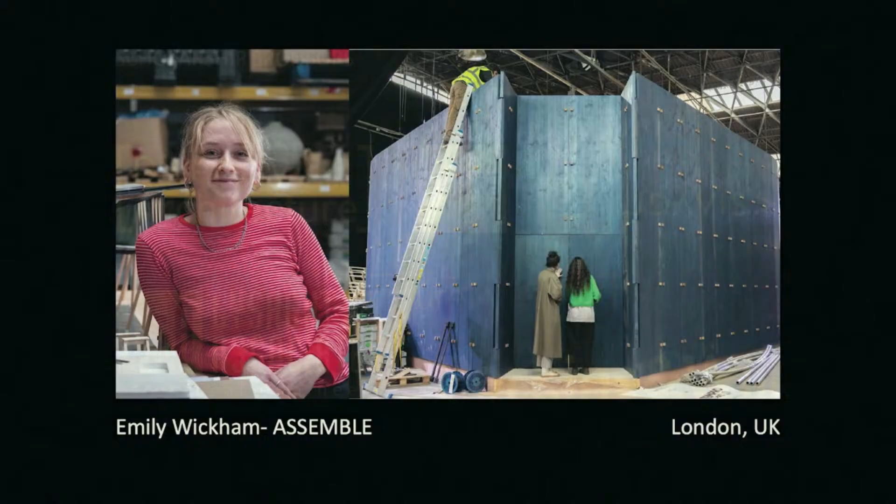Good evening, everybody. I'm coming out here because this makes me feel really extra short.

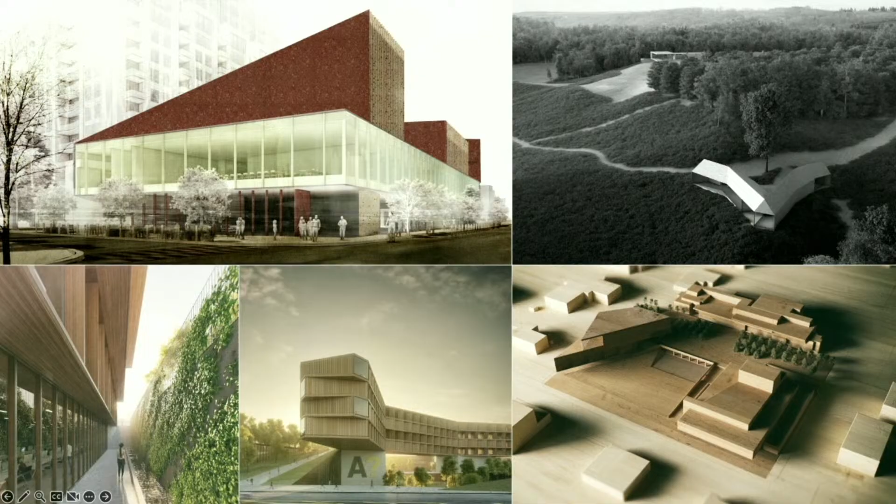Our challenge is to maintain a critical practice while also having a professional practice. So we're balancing client interests with our architectural voice. The things that we want to do and the things that we have to do become the same thing. Buildings have to function well, be sustainable, meet code, be resilient, but they also simply must be beautiful.

Everything you're seeing on this page is built, under construction, or kind of halfway there. The project on the top left is our first affordable housing project that we're really proud of, which you'll have to see next time because I'll show it when it's done.

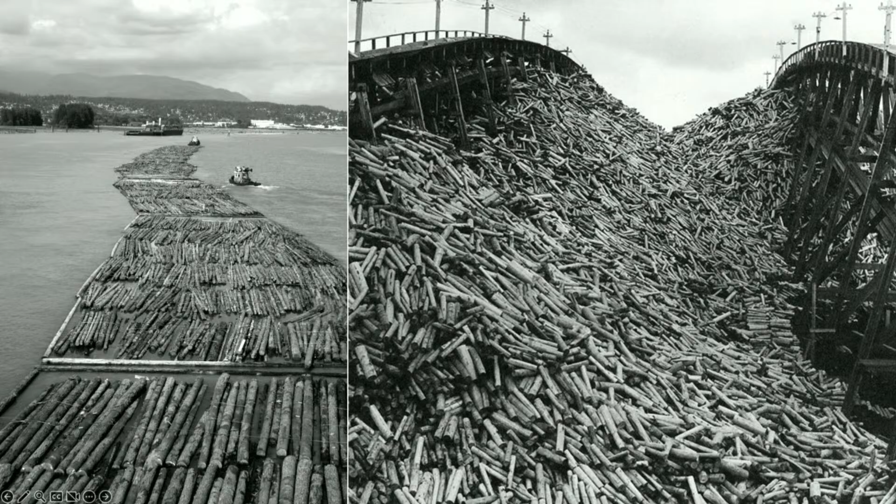Materials are primarily sold as raw materials. This is another log boom on the west coast of Fraser River in British Columbia. Canada leads the world in wood exports, with 31 billion kilograms of wood annually produced and exported as sawed timber, pulp, or paper, with the US, China, and Japan as the largest foreign markets.

So if you've been wondering why we've been in the news so much in the last six months, this is a big part of the reason why.

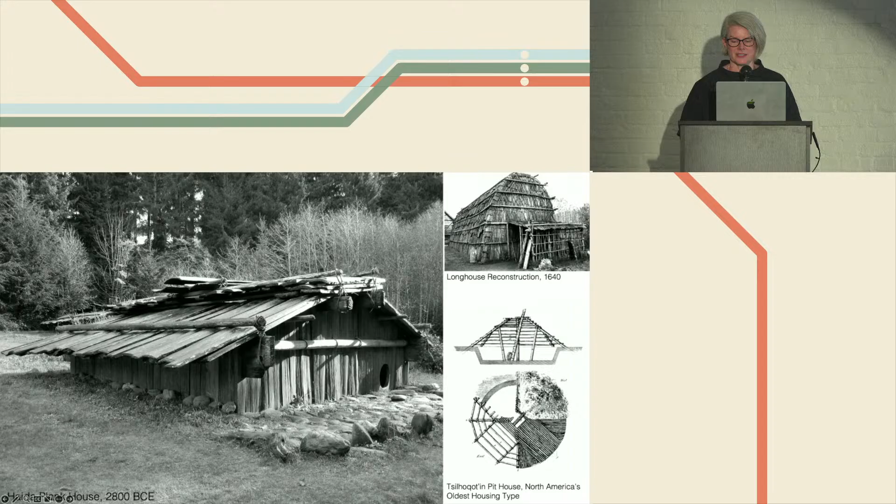Canada has a long history of building in wood. The indigenous peoples of Turtle Island developed rich building traditions thousands of years before the arrival of the first Europeans. There's a longhouse reconstruction from 1640, a basic house type of pre-contact northern Iroquois, all about communal living.

The Tsilhqot'in Pit House is regarded as North America's oldest house type. The Haida Plank House originated in 2800 BCE. That's on the west coast of Canada.

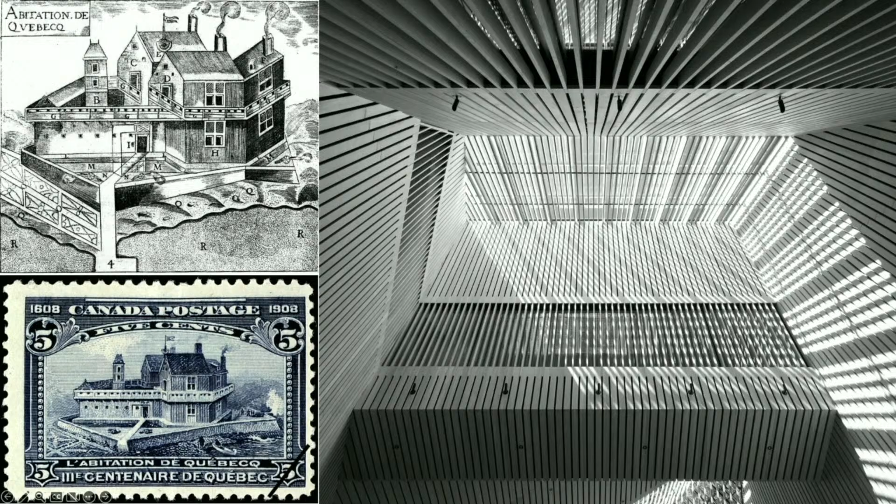Post-colonization, in more recent history, you see the Habitation de Quebec, the first colonial building built as a fort and trading center in Quebec. And on the right, the most recent history, John and Patricia Patkau's Audain Art Museum on the West Coast.

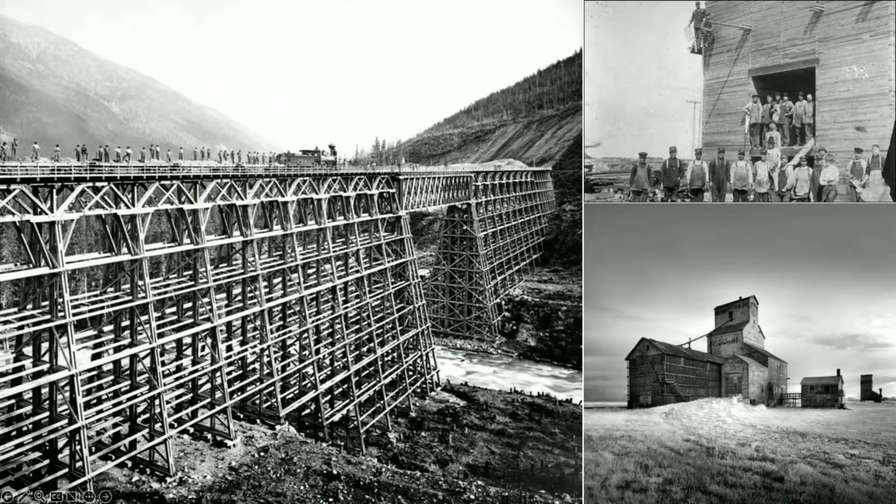There's also a deep tradition of wood structures defining industrial growth: the Mountain Creek Trestle Bridge in 1890 in Selkirk, British Columbia, and the famous Saskatchewan Prairie Silo. All the way across from east to west, there is a history of the people living in our region building from the materials around them.

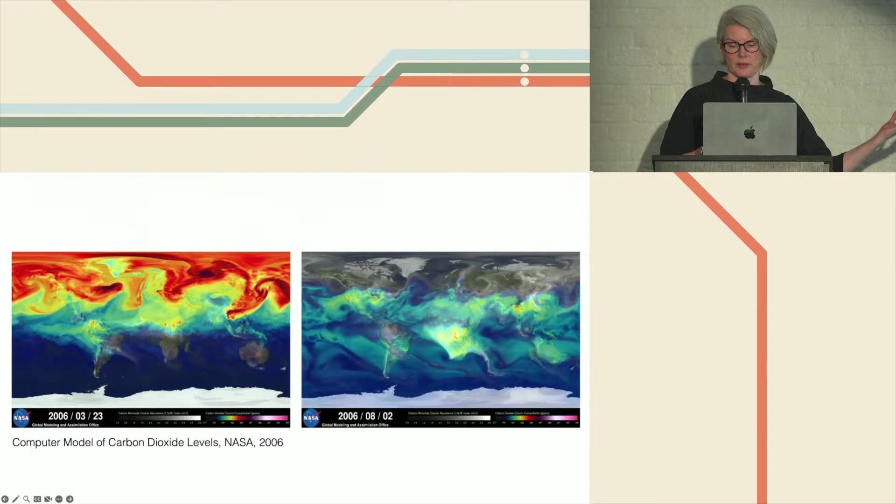So why is this important? Timber is important, and these are stills from an amazing NASA animation of a year in the life of carbon in the atmosphere. It's Googleable and on YouTube, and it's a really cool video to watch.

It shows that in the winter months, on the left, the carbon in the atmosphere, shown in red, is highly concentrated over urban centers. Then when the trees all pop their leaves, you see August 2nd on the right, and you can see how much carbon is removed from the air.

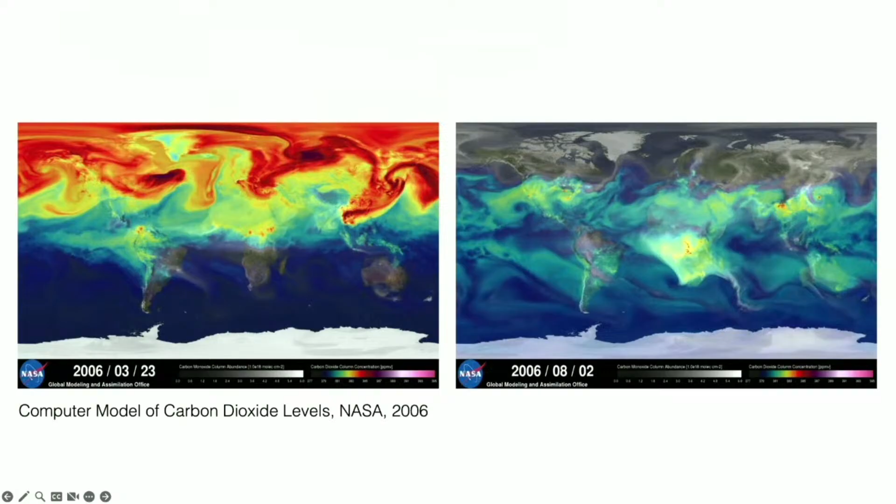Keeping track of how much carbon we're putting into the atmosphere is hugely important as architects. We have so much influence on the kinds of building materials used and the resources consumed. So that's my little speech part.

We have always seen opportunity to use timber from our very earliest work. It's light, it's cheap, it's easily machinable.

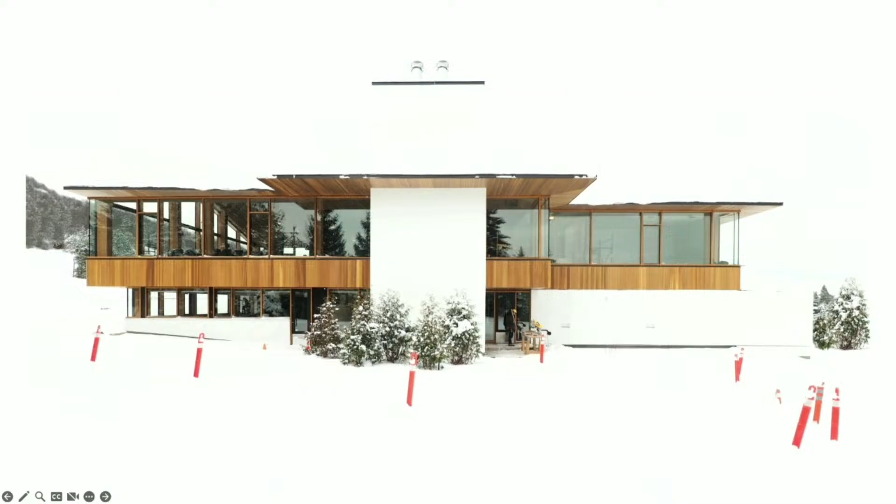This is a project for a ski club called the Osler Bluff Ski Club, in the town of Blue Mountains, about two hours north of Toronto. It was the renovation of a 50-year-old heavy timber and core slab building, and we used wood to connect the club's history to its more modern past.

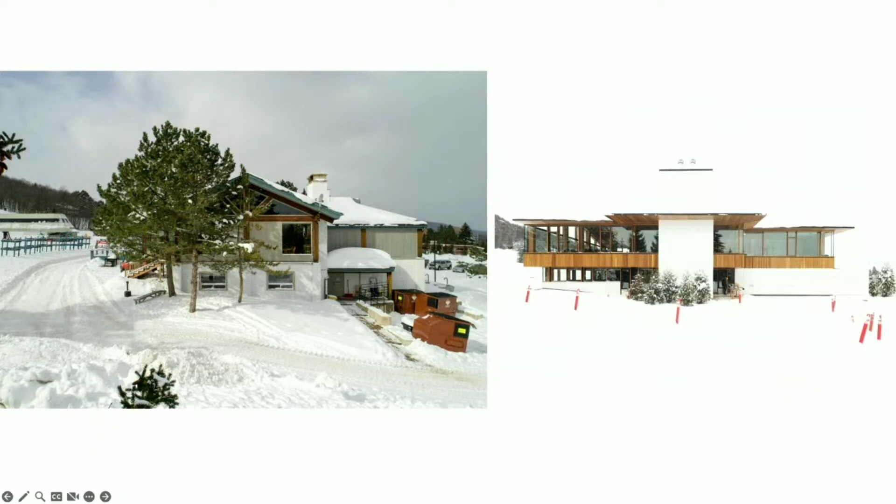Here is a before and after of the same side of the club. All the white underneath the wood planks you see on the left—the whole building was covered in asbestos stucco. So the first thing we had to do was bubble the building and remove all the asbestos.

You can see a little bit more here. This is the before picture, and all of the heavy timber here was exposed to the elements.

It had these really beautiful beams, but they were all cracked—some had cracks about an inch wide. Everything was leaking. It just wasn't working that well as a building, and it was slightly too small.

Our solution was to surface the entire building in a wood-backed curtain wall skin of treated Douglas fir. Everything you see on the face of the building is Douglas fir treated with a Sansin product to keep it bright so it won't weather.

We put all of this outboard of the heavy timber, which you can see in this slide, especially on the right, in this layering. This let us preserve the original wood structure and use all of the existing timbers, while the skin stabilized it environmentally so it could have another 50 to 75 year lifespan.

The image on the left shows some of the heavy timber structures, these chunky ones, and the new bubble of space we built was about a 15,000 square foot addition that we put on the far end there.

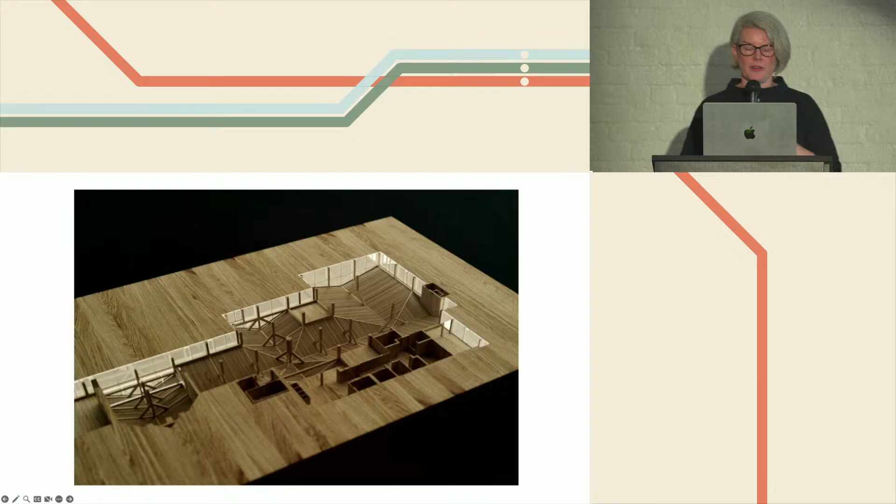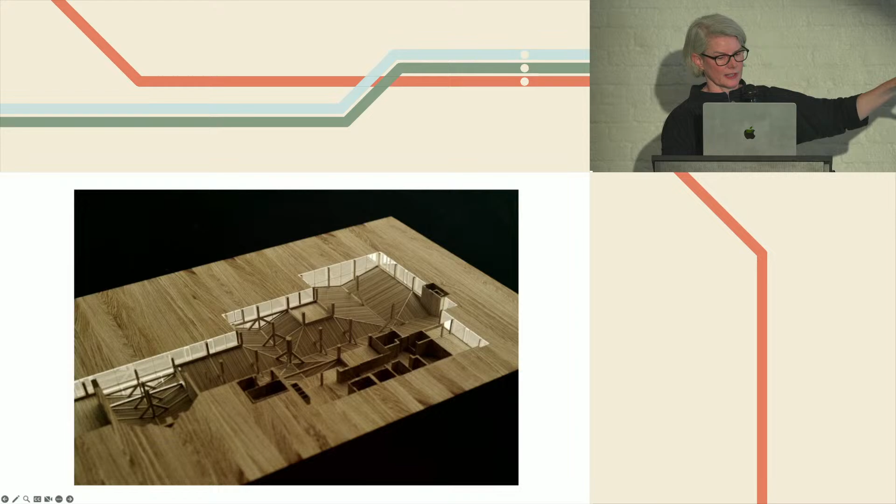Unifying these two things came through a treatment of the ceiling. So you'll see in the images, and this is a physical model that serves to us as sort of like the physical model of the reflected ceiling plan. So you're seeing the ceiling kind of carved into this wood surface.

We did a custom acoustic ceiling here because the club was so loud that you couldn't have a conversation with the person standing next to you. So we had to dampen the noise.

We did a multi-layer dampening system on the upside of these Douglas fir slats, cranked all the panels into place above, and then put this in between every single wood beam, whether it was old or new, so that when you come into the club, the primary form is of this slatted wood ceiling.

So they didn't have any space to watch the ski races. Just to be clear, Ontario does not really have skiing per se. It's very low hills that you can go up and down. It takes you maybe a couple of minutes to get up a high-speed chairlift, and a couple of minutes to get down the hill.

One of the reasons why they needed to redo the clubhouse was that everyone was getting all their runs in by lunchtime, and then sitting around saying, we can't do that anymore, what else do we do? So they had started to plan all of these activities in this old clubhouse that didn't really have any generous spaces.

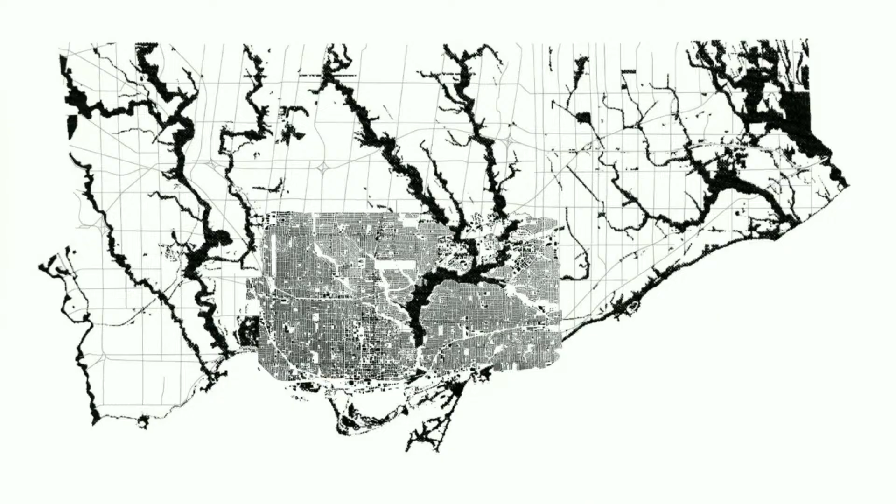If you picture it, the city grid is all on one level, and the ravines start here and dig down towards the natural water courses, these crevices. And what you have here is like the urban center.

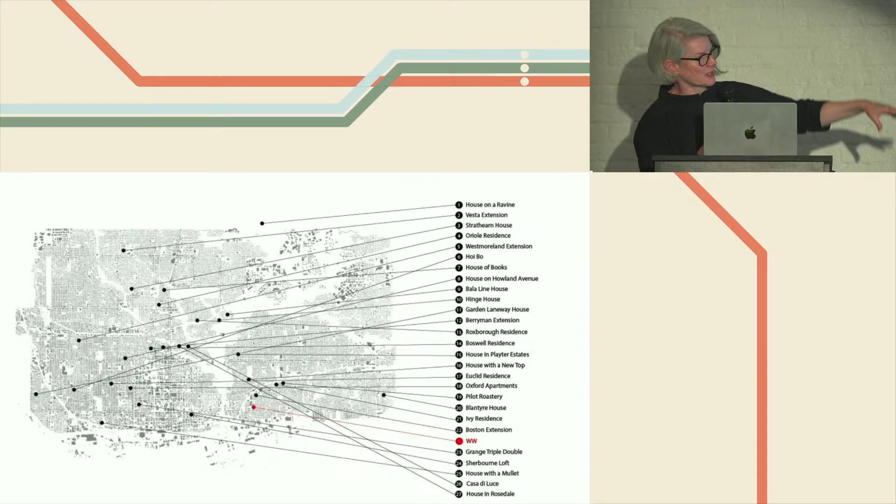Our work—probably half the projects that we have—is spread all across the city. Our office is there in red at the bottom, on the east end of Toronto.

One such ravine project—and these are the most prized lots in Toronto, with the largest land value—is where custom homes primarily get built. This one is called the Bala Line House because it's situated on a ravine with an old rail spur at the bottom called Bala Line.

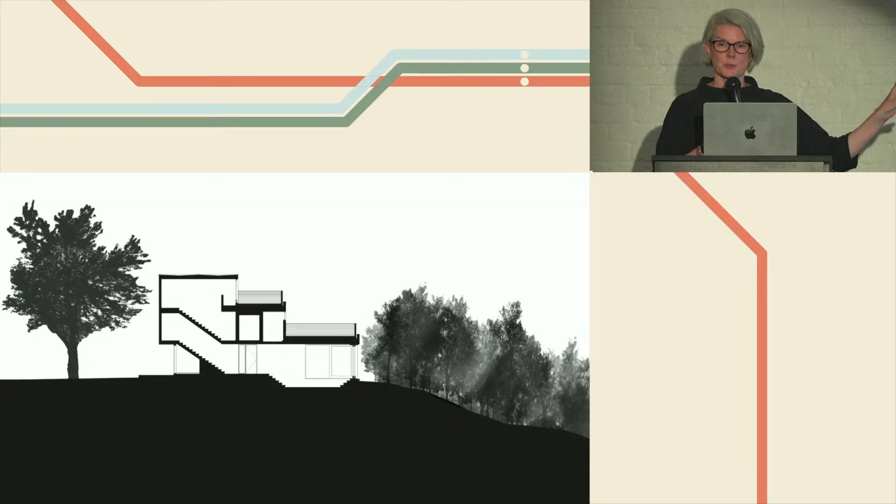This project will show briefly as an example of the kind of section that's achievable. The houses all line up on the street face, and then the ravine cuts down in section. In this project, we made a great effort to reinforce and replicate the slope of the ravine as it comes up figuratively through the project.

This is one of the projects we did fairly early in our career, and it's kind of the one big move—a big corner window that opens fully, a wood window onto two sides. It connects the living space to the ravine, and it's for a family with 3 kids.

From here, the ravine gently flows down about 200 feet to the bottom. So here we have kind of a dip, as you saw in the section, with the stairs coming up. The living room is sunk low, and the kitchen is situated on the upper level.

When you open the windows at the front and back, you get a full breeze through the entire building. This is an early project where we actually didn't install any cooling. We have operable windows high up, and the family opens everything to flush the house out—it's working relatively well.

Just for reference, our summers get about as hot as it is today, though I know we don't get the heat you all had last week. Even in this project, which is fairly low budget from our end, we try to—it's a stucco house with some wood and concrete detailing, and we were able to do this custom concrete bench right at the front.

This is another project, the Grange Triple Double, and this was one of the first forays we did into multi-generational housing. As issues of sustainability have become one of the most prevalent conversations of the last 15 years, it all gets distilled down to metrics—how much carbon you've sequestered, what's your energy, what are your LEED points.

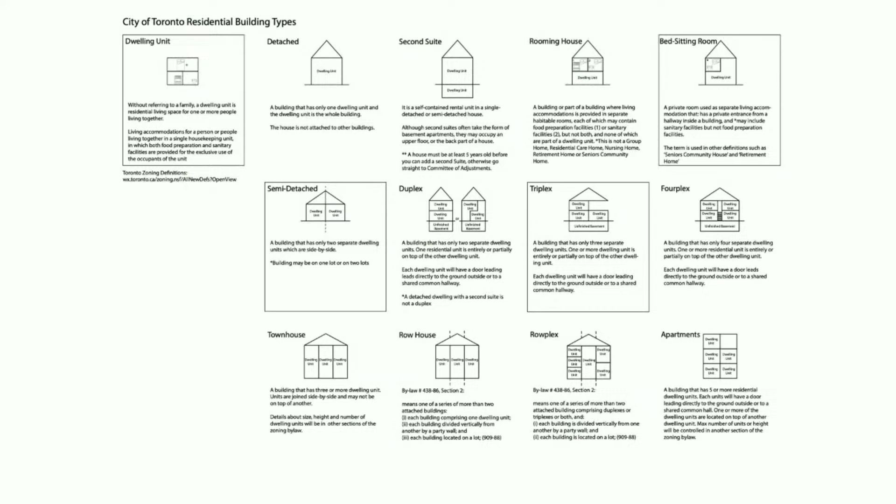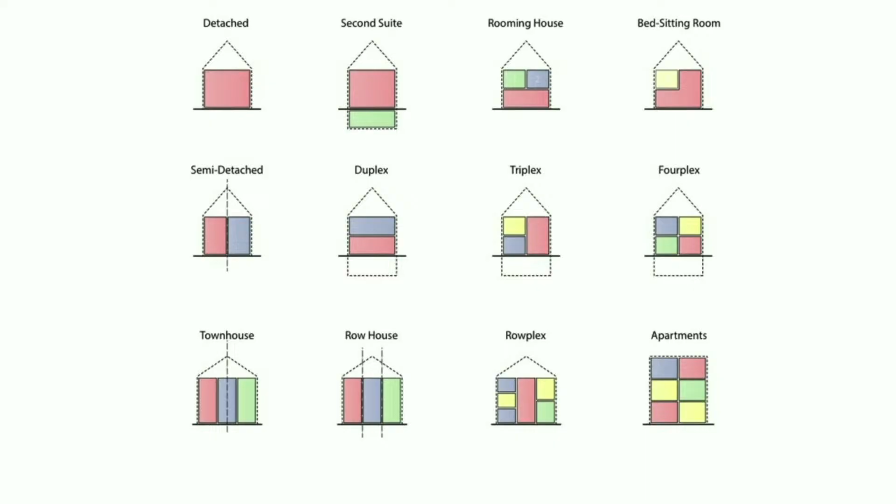To create this, which was a fairly unusual ask from a client, we developed a process where we researched the types of units allowed by the City of Toronto, which provided the raw material for the spatial organization of this project. Here they are diagrammed—from a detached home to a duplex, a triplex, a fourplex, apartments, et cetera.

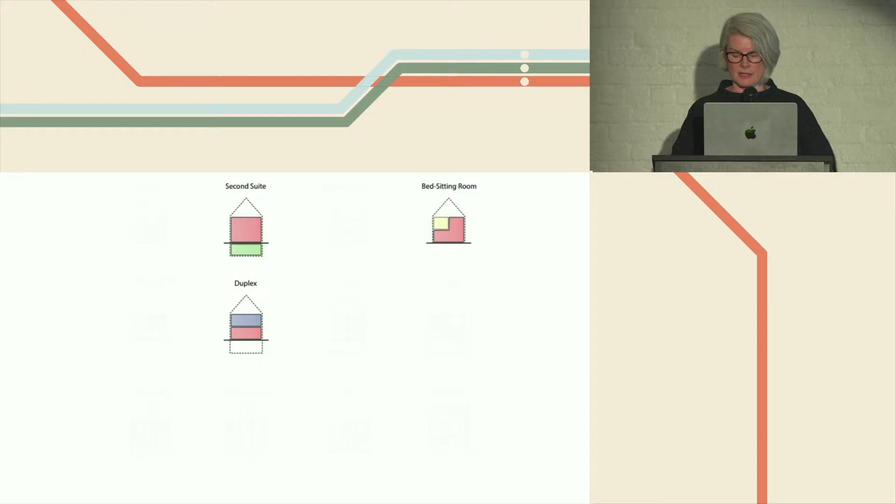Of all the building types recognized by the city, we found that a second suite, a duplex, and a bed-sitting room could merge together to create this mix we called the triple double. It was economically feasible, allowable under the zoning bylaw, and definitely an unconventional form.

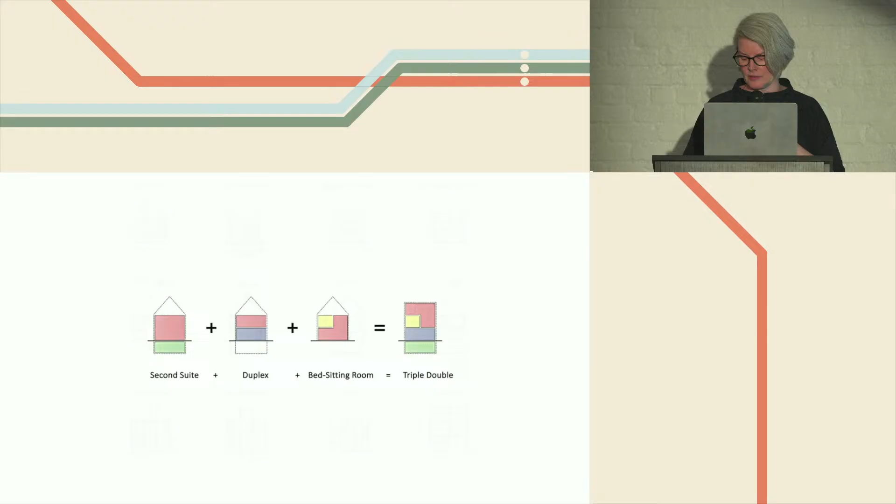So here you see the massing—the principle was to make it slightly taller than it needed to be. They didn't have all the money in the world, so we had to build only the amount of square footage they could afford, but we wanted to match the height so the house held the corner.

We used painted brick, and we call it like a blowfish, because the house is bigger on the facade than it is behind the facade. If you look on the right-hand side, the white rectangle that juts out, there's actually a garden space behind there, but it looked too small when we just fit the form to the program, so we made it bigger than it needed to be.

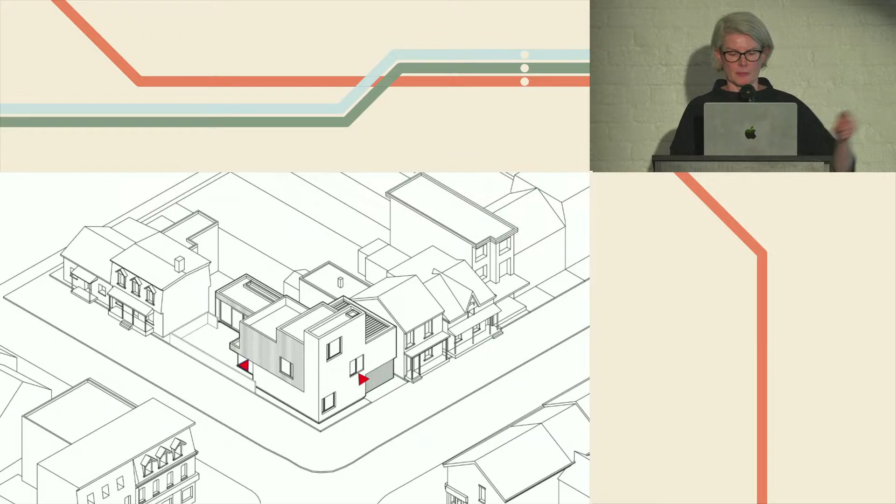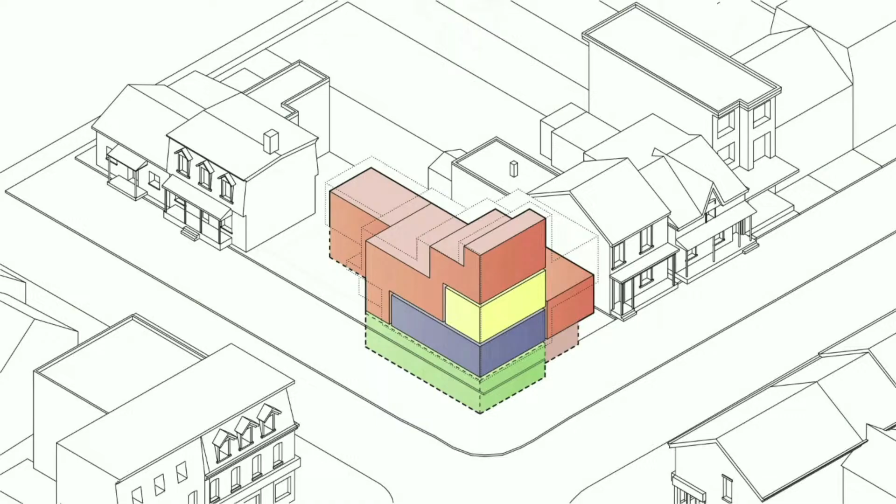There are two entrances: a family entrance on the left, and an entrance to the apartment on the right, giving private access. The entrance on the left is to the red and yellow portion, where the single-family home juts up over the top, and the entrance on the right is to the green and blue. These correspond to apartments that can be shared or split apart depending on what the family needs.

Each unit has a dedicated green private space. The extended family shares the courtyard on the left, which is the shared family space. The primary bedroom has the courtyard on top, and then the courtyard on the right behind the facade is actually off of the second floor.

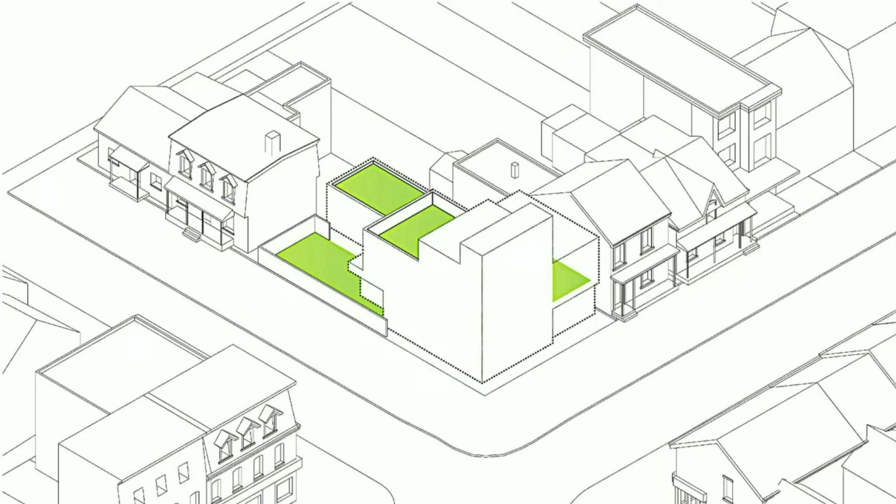And then by organizing all of these spaces, climbing up and over the top, we create an effect where you can open the patio doors and all the warm air just shoots up through the top of the house.

Okay, so here we are back at the facade. So while not explicitly performative by measures of sustainability, there were a few things that we did to add conservation into this project.

The brick facade is made up of leftover bricks. So what that means is we called the yards around Toronto and asked if they had any bricks that weren't enough to sell, and if we could buy them for half price. So we got our bricks for pennies on the dollar, put them all up, and then painted them white to unify them. They're called remainder bricks, so you can buy those pretty cheap.

And then here, there's also a low window-to-wall ratio, so it's actually really efficient, especially on the north side. And solar panels on all the flat roofs that are not green.

Okay, so this is kind of as if I peeled the brick off of that previous image. So what's the big premise of the project is that if you see the courtyard here, and then the kind of grid space, that is the family living room.

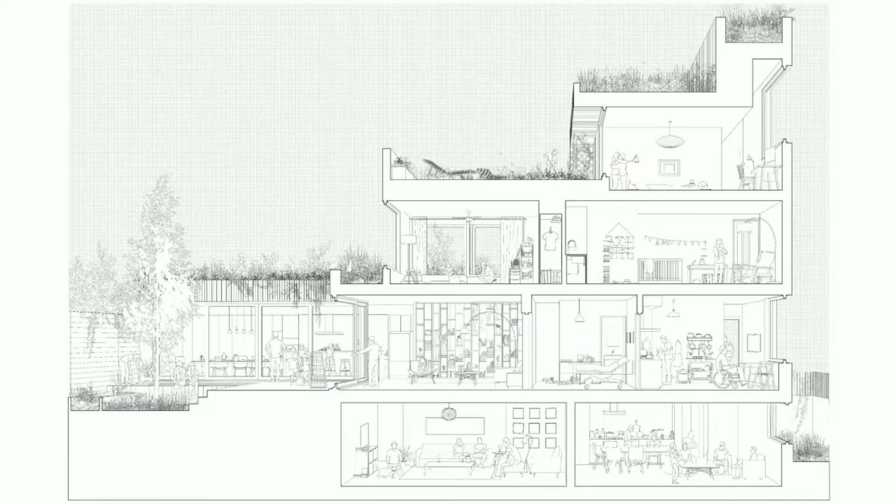Right now, there is an entry closet with a door in between the family living room and the apartment on the right. The apartment on the right is sized to be fully handicapped accessible, so that if Shazan's parents couldn't climb stairs anymore—they originally were supposed to take the bedroom on the second floor—they could move down into the apartment on the ground floor, not climbing any stairs.

The apartment on the ground floor is also connected to another 2-bedroom unit below, so you could have a separate rental unit or a live-in caregiver.

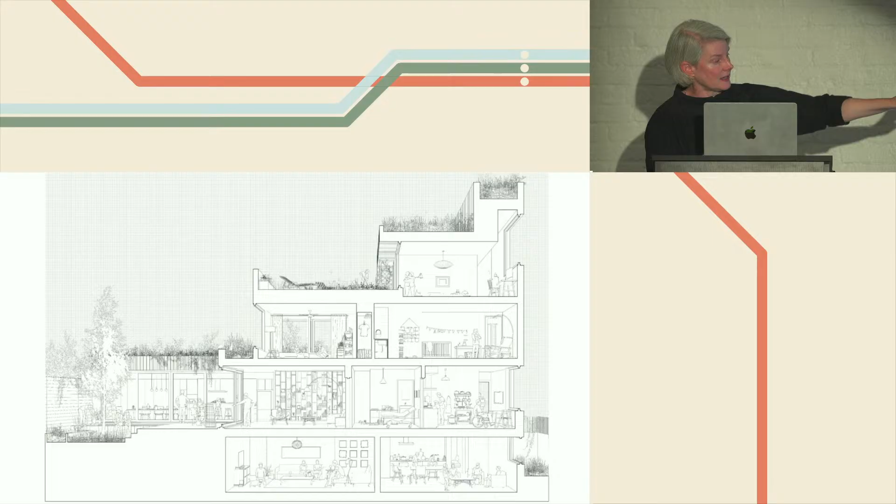The family space in the basement on the left belongs to the family. So if you think about it, there's kind of 3 separate living units, and they all have doors between, so you could combine them all into one, or separate them all out to be individual.

They've had renters on the ground floor. Ryan had his business in the full basement for a little while. And when Shazan's parents saw the house, they liked the top floor so much they took the primary bedroom for themselves. So Shazan and Ryan ended up moving onto the second floor right away.

But here's a view of the bookcase built into the stairwell. The family spaces are centered around the courtyard, this living room, and the kitchen and dining room. And the doors can completely open and blend all these spaces together.

So one of the big conversations we had during the design of this project, and it changed so much during the design phase, was that Shazan and Ryan did not want to feel like they were teenagers again living at home with mom and dad. So for a while, the design had 2 separate stairs that intertwined around each other, allowing the parents to have a path through the house and Shazan and Ryan to have a fully separate path through the house. It was interesting, but it took up a lot of space.

So the economics of the project started to shift, so that we would just have one linear stair that went all the way up. Again, this house is kind of early in the career. All of the millwork is out of the box, meaning it's not custom—it's kind of IKEA-like, installed.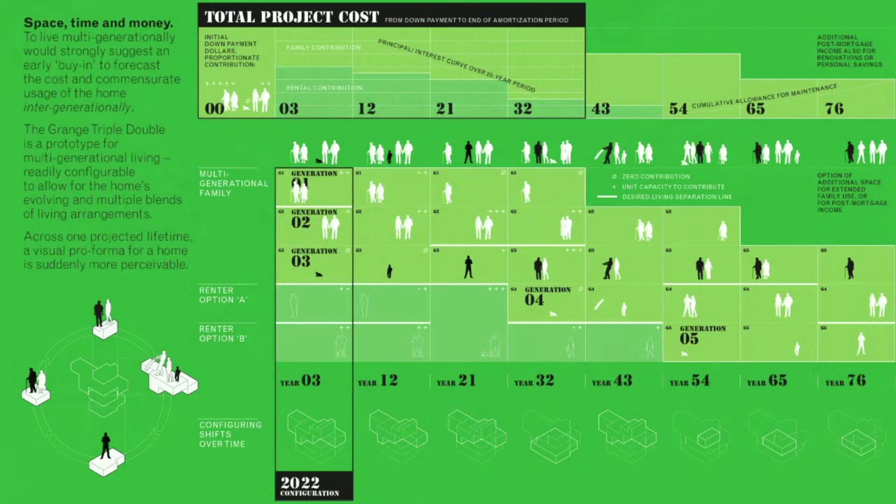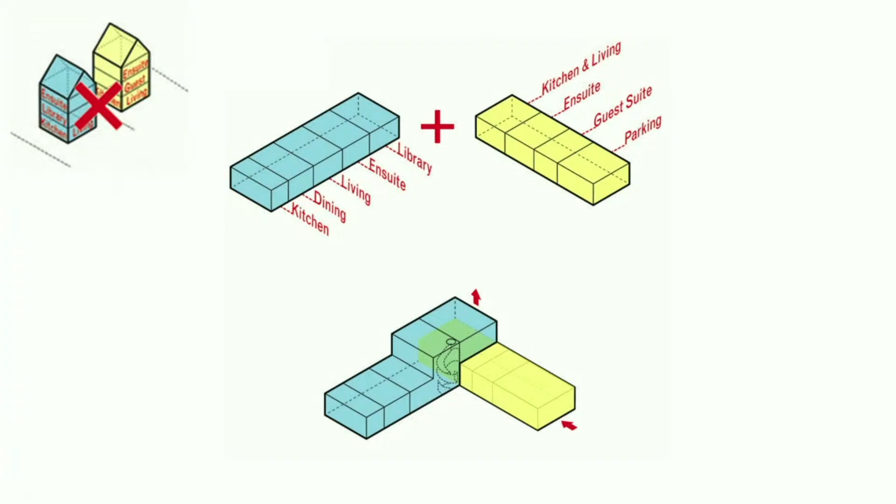Spatially, instead of having two homes, one for the couple who lived at the house and one for the parents, the blue is kitchen, dining, living, an en-suite, and a library. The yellow is the parents' suite: indoor parking, a guest suite for other family members or a caregiver, an ensuite, and a kitchen and living. The blue kind of steps over the yellow, so it's conceived as two distinct residences.

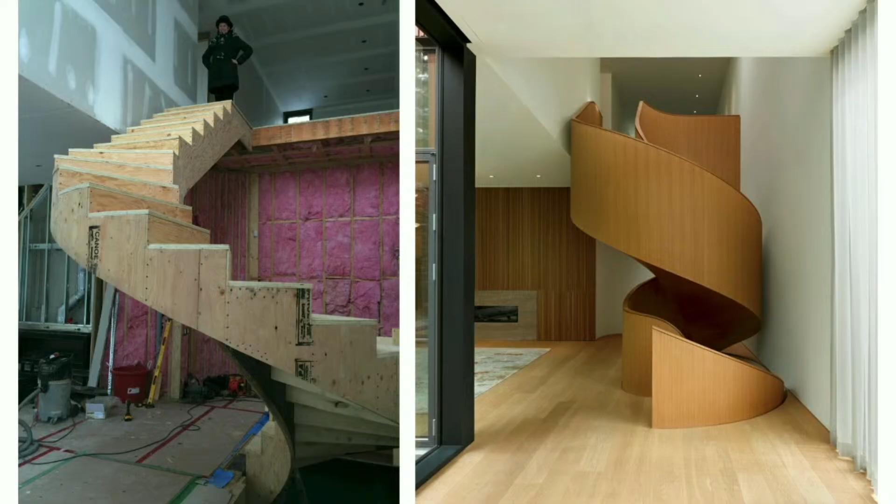So this is a view of the stair looking from the living room back, and then this is it in construction. Our structural engineer, a young woman named Shannon, devised the stair to be fully built out of wood, aside from a quarter-inch thick ribbon plate, one on one side of the riser and one on the other. These basically form two columns that spiral apart from each other as it opens going up, and then the two sides are tied together with timber.

So unbelievably, the stair was fully structural even without the side railings. The side railings are about this thick. They help stabilize it for sure.

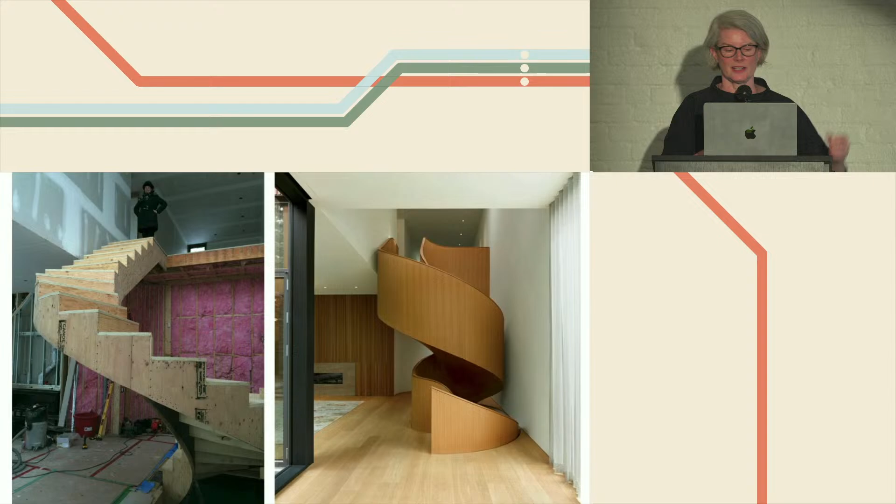It's a little bouncy at this stage, but the contractor was not convinced that this was enough and kept trying to add wood underneath. And she would go to site and be like, no, take it out. This is done, you know.

And what it provided, the reconciliation with the back wall, provides this amazing amount of complexity and views.

The veneer that was done at the very end of this was done by the flooring contractor, believe it or not. So they took on the responsibility. They built a full mock-up of the stair in their shop, built the entire stair, figured out how to match up the veneer so the grain was all kind of tapered in. It was just an incredible amount of work, and they did a really wonderful job.

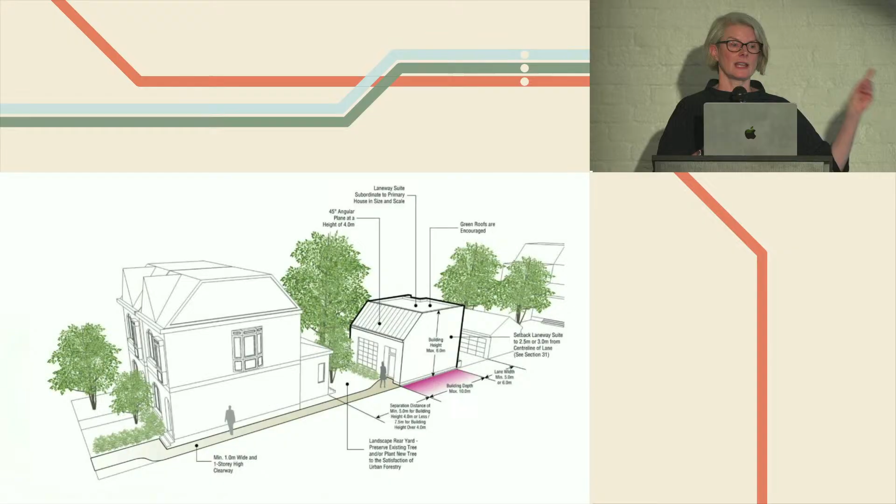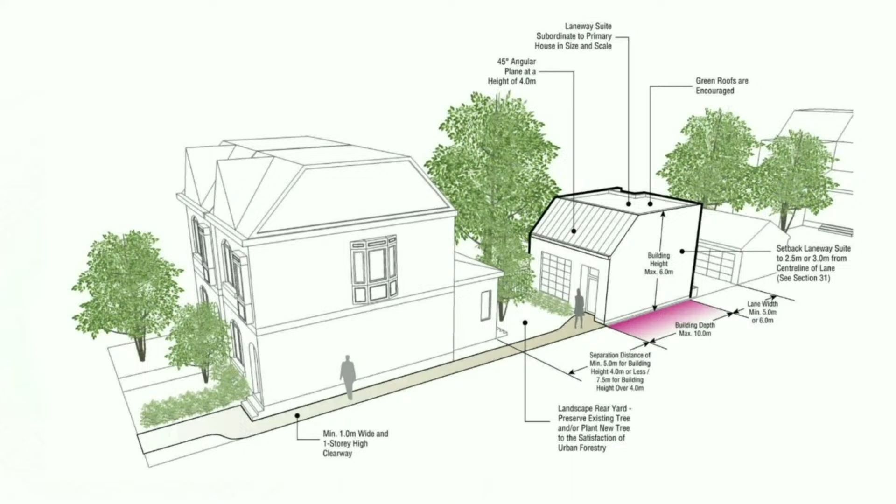There was a huge amount of social infrastructure built into the backs of these houses. What's really nice about that is the laneways are all in established neighborhoods, so you have a built-in school district, infrastructure, libraries, grocery stores, all the stuff you need for housing is already there. One of the reasons they put a fairly serious restriction on what you could do, and they're starting to loosen it up a little over time, is to get more housing units behind the houses. You're not allowed to sever your lot, so you can't build one of these and sell it for profit. You have to keep it as part of your lot, then you get a tax deferral in perpetuity for having a second unit. So they've kind of figured it out.

The story of this project is that the family originally wanted to build a cheap and cheerful laneway suite, move into it, tear down the existing house, and then rebuild that. That was going to be the dream house. The more we worked on the laneway suite, the more interesting it became to them as the project.

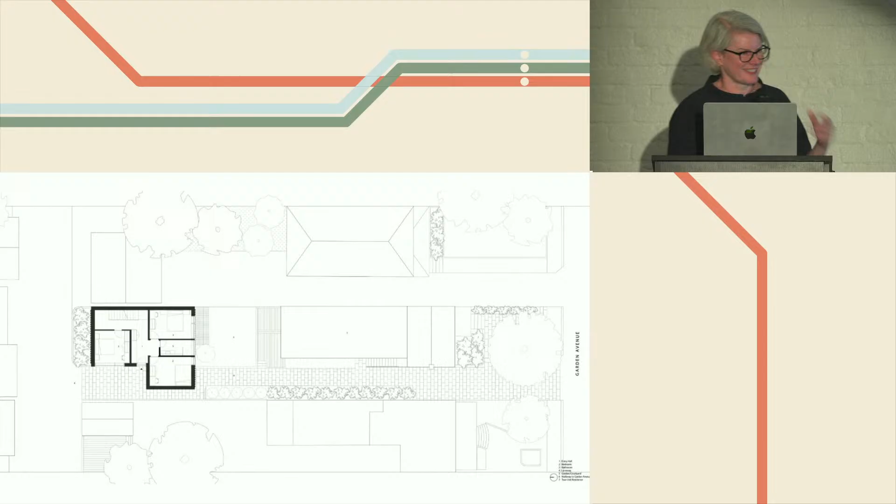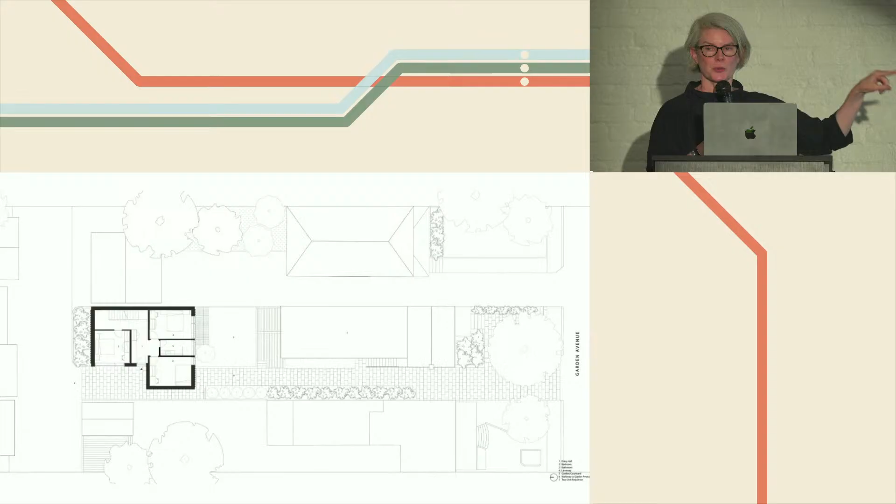About 3 months in, we were designing both at the same time, because you have to be careful about what you're doing on one due to fire codes. They said, you know what, we've changed our minds, we just want to live in the laneway suite. And I was totally fine with that. Obviously it's their decision, but I was a little surprised because they are a family of 5, with 3 teen boys, and the largest square footage you can get per plate in the back is 800 square feet.

So it's a pretty small area.

Here you see a plan view, with the main house on the right. I'm going to do an axonometric walkthrough from top down. This is the roof garden, accessible through an operable skylight, and there's a skylight next to it.

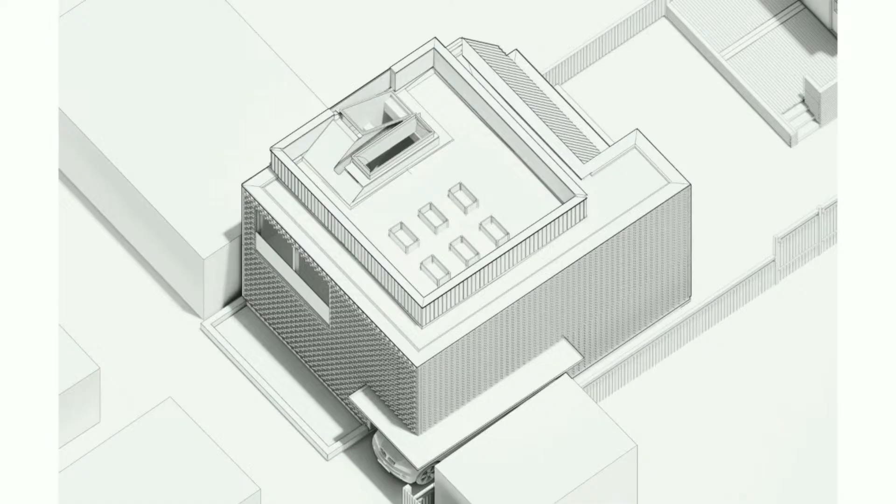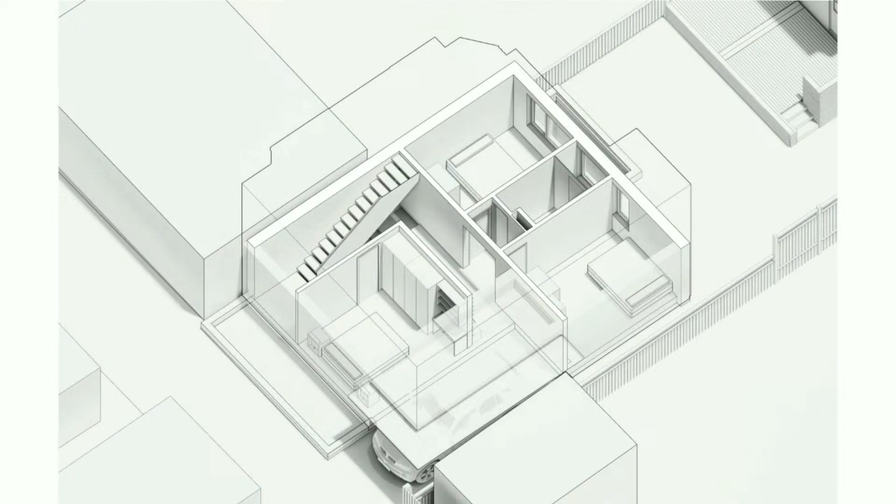These are the floors. The house is programmed kind of upside down, so the floor that gets all the light is the floor where the family hangs out: kitchen, living, dining, a little powder room, little mechanical room. Then you have the 3 boys with bedrooms on the ground floor and their own bathroom, and below grade, the mechanical room and primary suite.

So it's exactly the opposite of how we normally design houses for clients. Normally the primary bedroom is on top, and the social spaces are on the ground floor.

Now the primary feature of the house is definitely the brick. The clients said if we're going to live permanently on the laneway, we want the house to have gravitas, to feel like a house on the main street. Primarily the houses in this neighborhood are all brick houses, so we collectively decided on red brick, and frankly to keep it from being tagged and give it some visual interest, because there's no room to move volumetrically in this house. This is as big as you can build.

We decided to manipulate the facade, crank the bricks out, and every other row is cranked a different direction, so that there would be some kind of volumetric animation, albeit on the surface. It helps the building not get spray painted, because the laneways are pretty rough, and it really feels great, and feels like it's a permanent residence.

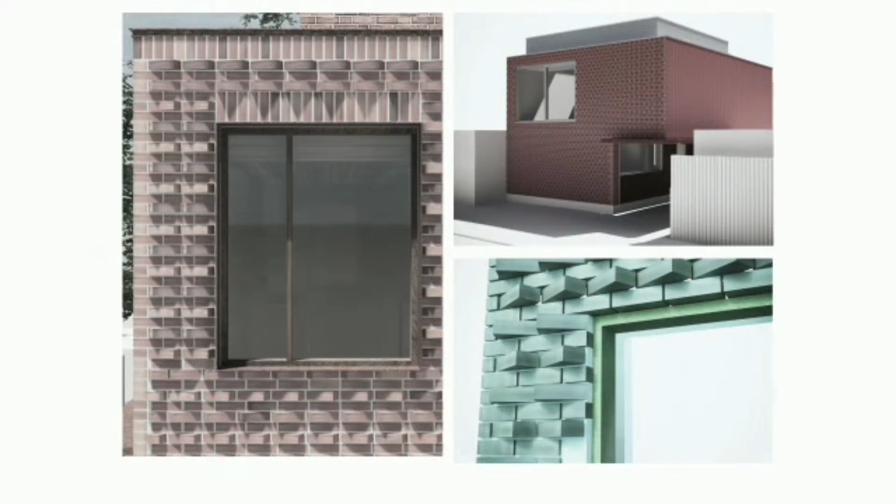Here's a close-up on the left of the brickwork coming up near the balcony window, and the entry is clad in charred wood siding on the right. In this project, as every project, this is one slide of probably 150 brick patterns that we experimented with to make sure it was buildable and actually came together with all of the alignments.

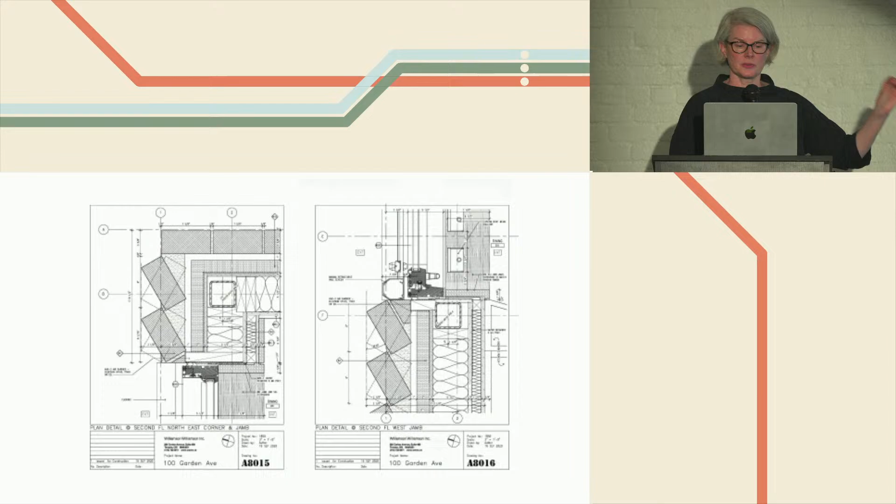The clients for the house are an interior designer and a mid-rise contractor, so we knew he was going to have all his mid-rise trades build this project. In that kind of genre of work in Toronto, you don't get a lot of detail—it's pretty cheap and cheerful. So we literally drew every millimeter of every brick cranking out. We talked to the trades, figured out how it was going to get built, and worked through every single turned brick in plan and section all the way around the house.

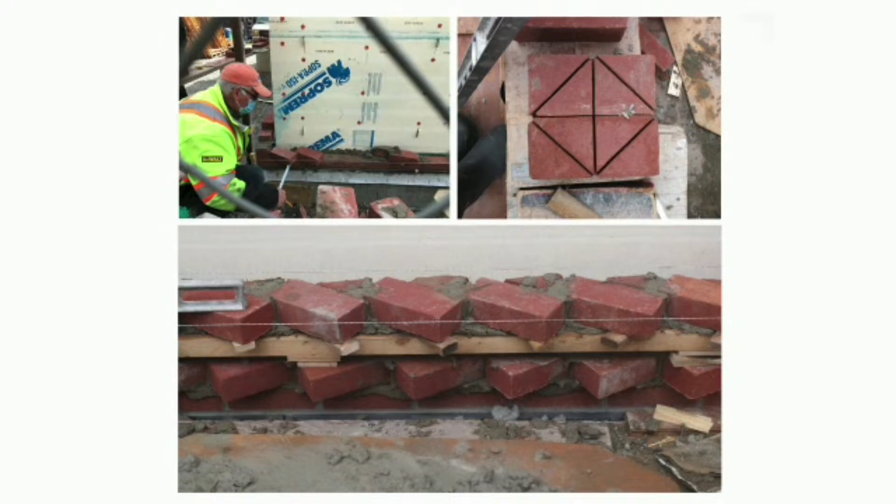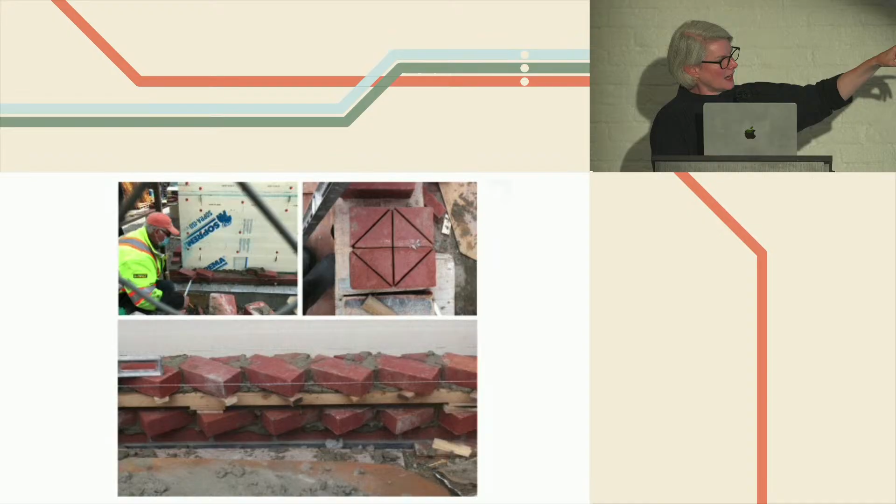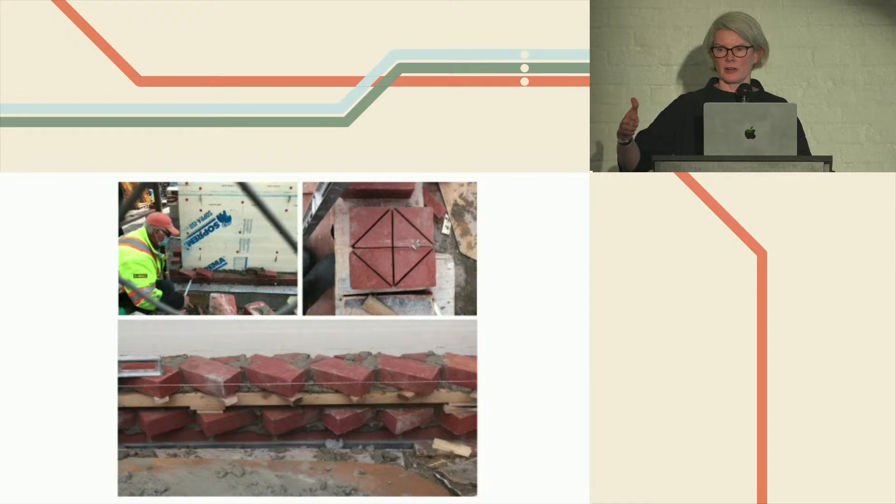But as we all know, building is really, really sloppy. You go through this stage where the foreman, who's a newfie—and if you're from Canada, there's a whole world of jokes about newfies—was there every day. We built it during COVID, working with the brick team. What we figured out together was that if they cut one brick into 4 triangles, they could use that little triangle as a backup piece and mortar everything together. They struck all the lines, and had to do the first 3 rows 3 times, taking them down to get the spacing right. But as soon as they figured it out, they ran with it, and it turned out really beautifully.

So this is just a brief look at one of the projects that has a spiraling stair connecting up through the middle. This little project, House with a Mullet, is what we call it. It has a very charming Victorian facade on the left, and then the addition is on the right. And this was kind of, again, the one big move came with a figuration of the roof.

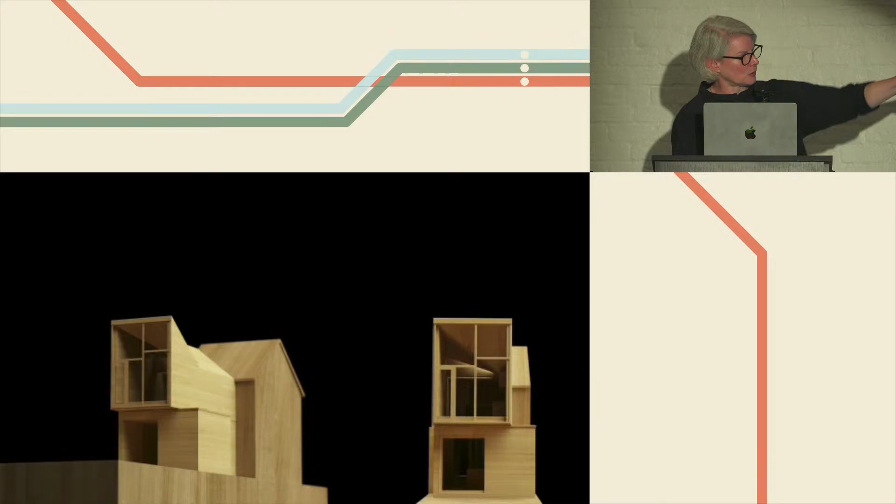You can see in the model where we canted the biggest window we could put together. It's a 14-foot high aperture on the backside, and then we canted it down and carved skylights into it. So you can see in the model on the right, there's a little bit of light coming through the center of that second floor.

This was done for a graphic designer and a postal worker. So there they are in the back with their daughter. And this is the ground floor, fairly simple. So the addition carves away to make room for a skylight. And then this is the room.

So again, a small project in our office, sort of like the one room project. But again, using all the techniques that we've learned over the years to carve light as many different times as we can into the volume to fill out the space.

And this is a view looking out, and they're lucky to have a street behind them and then a park right across. They've got really great foliage in the back and a view of the skylight. And then a night view we included just to show how the skylights get kind of rounded out in the evening.

And this kind of discussion of light comes into this project, which is probably the latest one that we've photographed and the clients moved into. This is called the House of Monitors, and we named it for a light monitor. And the ethos of this project found inspiration in the lives of the owners. This is done for a shoring contractor and a scenic painter for the Canadian Opera Company. So it sounds like a studio project that you'd get in graduate school.

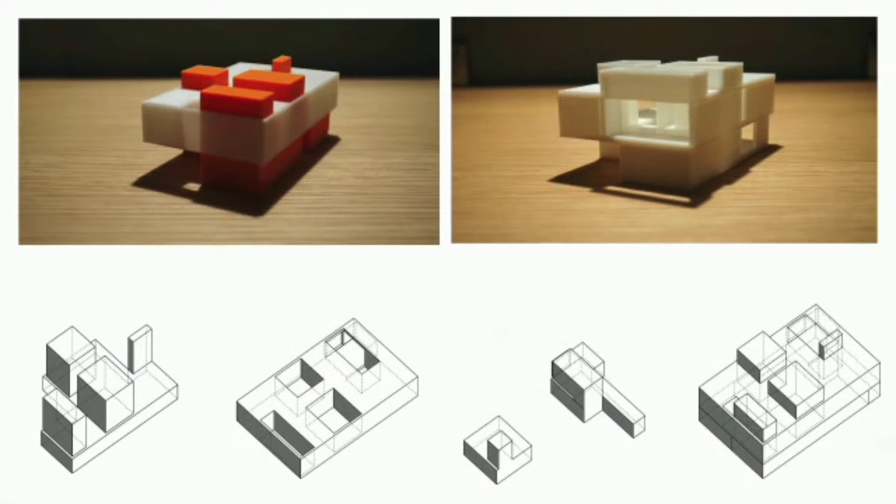So the volume study for this house is, if you see in the orange, those are the concrete volumes coming up and touching the light. And then the white in the model on the left is this timber floor that's elevated above the concrete foundation.

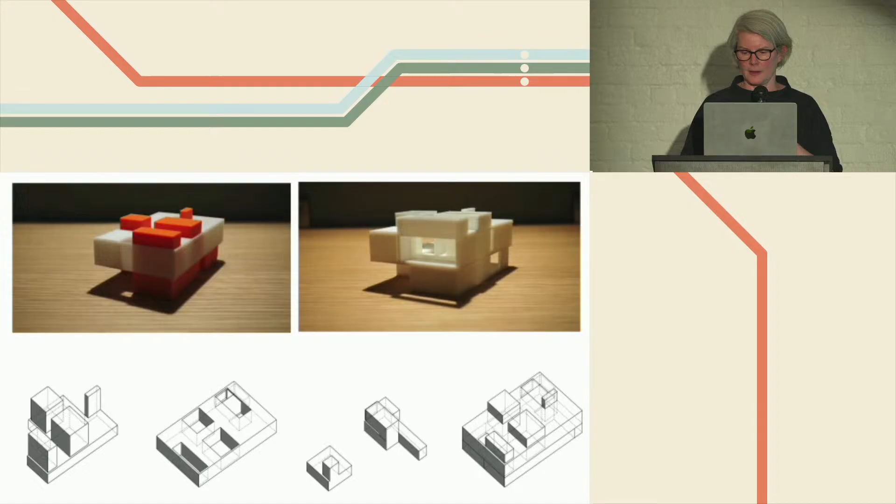Then a whole process of subtraction, a big design process, occurred where we started intersecting these volumes and removing space to get 2- and 3-story volumes, punctures through, views through. It was a fairly intensive design process, resulting in the house you see as completed.

So it's got a concrete basement, a concrete floor, first floor, both inside and outside, so it's a double wall construction with insulation between, and then a timber floor hovering above. It's only a 2-story house, so all the 3-story bits are skylights and large spaces above. There's a big cantilever on the front for parking below, because they did not want a garage on their front facade, and a huge cantilever on the back.

This is a little bit hard to understand unless you're there, but this is one of the spaces where you come up onto the second floor and you're looking back through the front elevation. The front elevation is screened with operable slatted screens, and then you see the light well on the left is to a 3-story space, and the light well on the right is to the painting studio.

Just a quick walk through the house, the front door is under the cantilever that you see in the image on the right. Much of the glazing on the ground floor is reeded glass, because there's a lot of activity on the street. They're putting their car there, and we wanted to keep the house feeling airy and open and be able to see light through these surfaces, but not want a visual connection through.

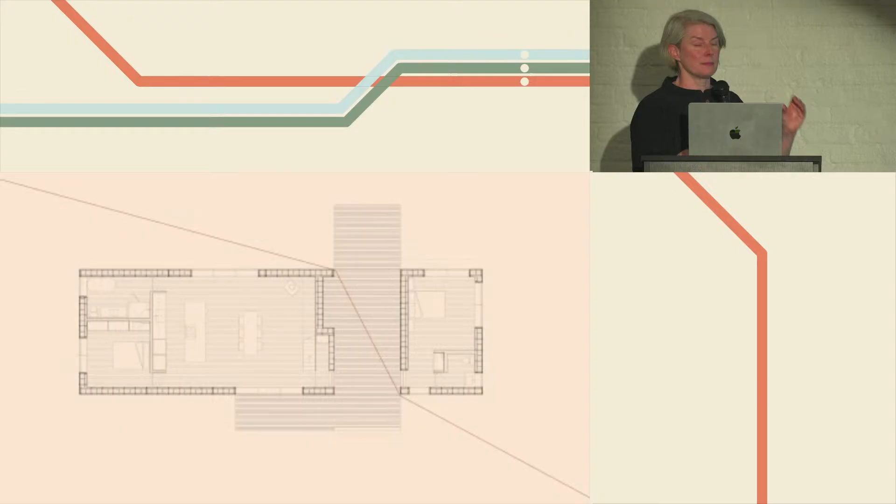Then these are clients that we had in the city who we did a small addition for, and they said, we want a cottage. How do we do this cheaply with you? And I said, well, we kind of have something. But the thing is we want to build it as is. We don't want to customize it, because that's what's going to be expensive.

So the piece on the left-hand side of the red line is the only part of the cottage that would fit on the tableland, and we literally shoved the rest off of the tableland, and it floats out, cantilevers off, because we said if it's going to be a prototype, it's got to act like a prototype. It's going to be what it is. And if it doesn't fit, it doesn't fit, and it's just going to fly off the edge of the site. And they said, okay, we can deal with that.

So the idea of the project is very, very simple. It's almost all wood. There are four really skinny 4x4 steel columns and one beam coming out to support the cantilever back to a frost wall. So it's just a 4-foot wall that goes into the earth. A gable shape, and then the project is stabilized by the gables that march through the house.

This is a view of the dog trot space that punches through to a view of the upper trees and the lake. And then this view is of the piece that's on the tableland, so you can see the gable shape of the house, which we just wanted to reiterate over and over again through the section. And then this is the piece that flies off the edge.

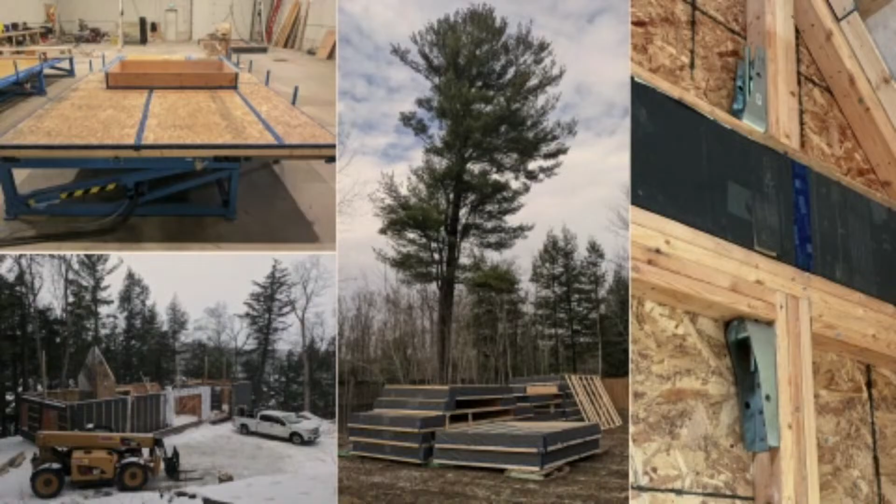So these are the stairs that you take down to go swimming, and then the primary bedroom is in the little piece of plan, on this side of the house. This was all prefabricated by a great builder who lives up in this area.

It is like the classic passive house section. It's not certified, but the walls are about 16 inches thick. It's a 9.5-inch stud, fully foamed, with a second layer of open stud work on the inside to run all the services through. It's got smart vapor barriers. Every surface is tied together with really kind of high performance barriers.

And you can see the stack - that's the shop on the upper left, a stack of panels on the right. As soon as the ground froze, they poured the foundation in the fall, the ground froze, and they trucked everything to site and craned it all into place, and then finished it over the spring.

It's fascinating. So the black thing on the right isn't a beam - that's actually a vapor wrapped wood piece, and then they're held together with these big, giant toggle bolts, essentially.

So this is a view. It's all wrapped in weathered 6-inch cedar siding, and then the colored parts of wood are pre-finished. The Maibec siding is like Cape Cod - it's one of these baked on, really kind of cheap and cheerful finishes, which we then took to the inside of the cottage.

So in order to alleviate this big section of any structure, we put all the structure into these gable walls, and that stiffens it, and it makes it - because the system's panelized, you don't need anything else. So it's actually a very, very simple system that gives you a giant cathedral ceiling all the way through the whole project.

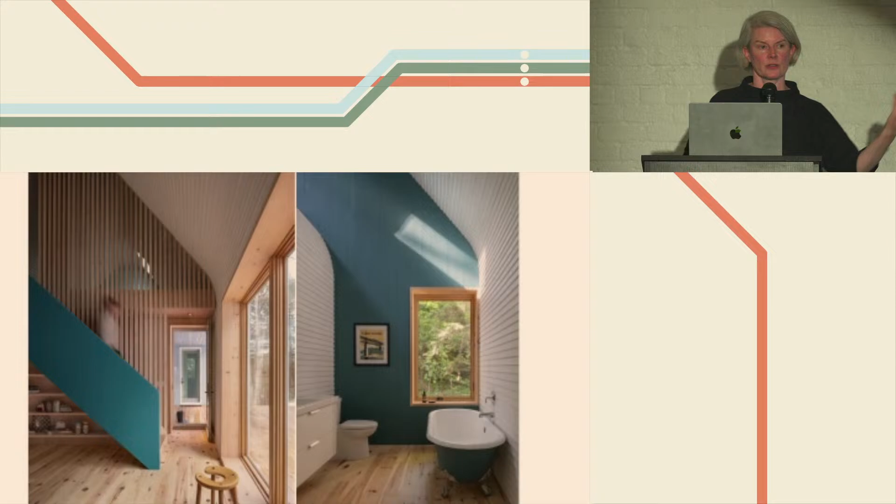And in the winter, that part of the house is shut down, and they move. It's a 4-season cottage. They move onto the other side, which has a wood-burning stove. It uses almost no energy. It gets its water from the lake.

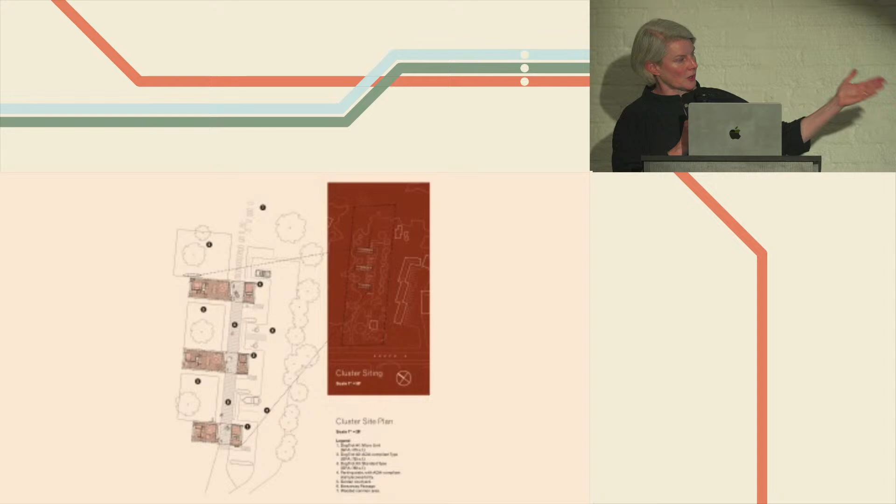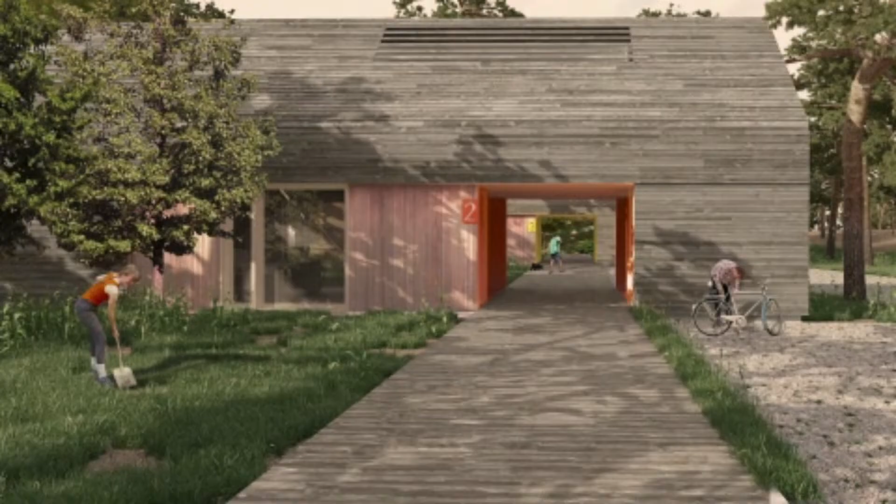It doesn't have air conditioning. They just open the skylights, and part of the reason you use heavily shaded windows—in the woods it didn't catch a lot of light—is the heat gain is almost nothing. So it's pretty sweet. One of the big ideas, in a drawing we did for the competition, was that you could string them through and make a small community out of them. This is a rendering of some of the houses where you could connect a boardwalk as a community space through multiples of these homes. But for today, we'll just leave here with Adam and Gwen enjoying the view in their small cottage in northern Ontario. Thank you so much.